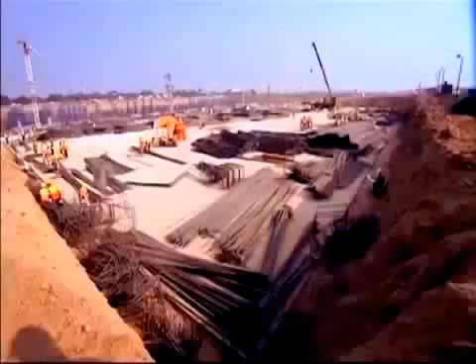A mammoth task completed against the backdrop of a looming deadline to the Commonwealth Games 2010. Thousands of workers construct India's largest post-independence building with unrelenting speed.

Technology was very much part of that system. I cannot change my specifications. I can't change the pipes. What are your deliverables at that stage?

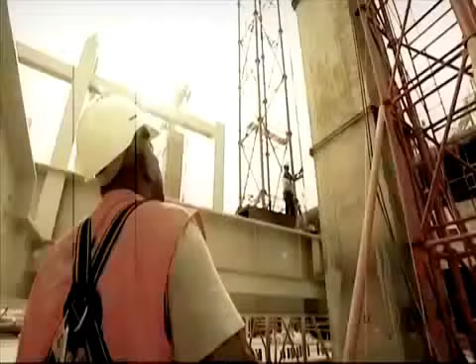This mega project brought in some of the brightest minds from across the world to design and build a state-of-the-art structure. Follow this team as they faced mind-numbing engineering challenges of installing a 45-acre roof and battled an unusual force.

Everybody said, no way, I can't put my name into this project because it is a seemingly impossible task before us. Watch this barren stretch of land on the outskirts of South Delhi, where a spectacular terminal megastructure comes to life in a record 37 months.

One of Asia's largest airport terminals, located in New Delhi. Terminal 3 is a symbol of India's emerging economic status.

With a capacity of 34 million passengers per year, it propels the Indira Gandhi International Airport into one of South Asia's most important aviation hubs.

This complex mega project challenged the creators, the GMR Group, at every stage of construction.

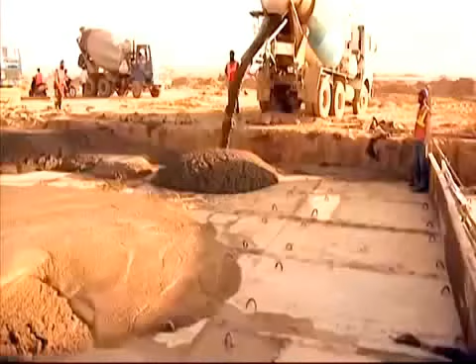On the southern outskirts of Delhi lay 300 acres of flat land, 3 times the size of the smallest country, Vatican City. In 37 months, this is where the new terminal rose.

On completion, it is said to be one of the largest and fastest built airports. An aerotropolis that represents modern Indian aspirations and infrastructure.

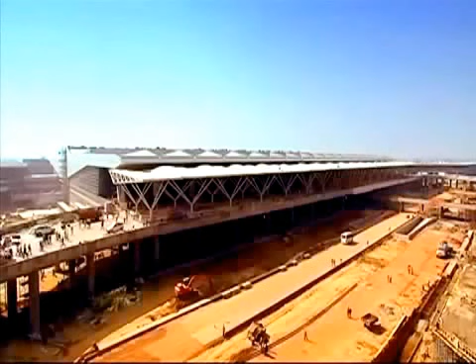In February 2004, bids were opened out by the government for the new terminal. The men behind the scenes had to be prepared for fierce competition.

We prepared almost for 1 year before, and we put the best people assembled for the bidding. I should say it is a God-given opportunity to fly the flag of GMR in the capital city of Delhi. That is the commitment which made us win this bid.

January 31st, 2006, the GMR Group won the bid, but for a company that started with agriculture-based industries and had slowly moved into the infrastructure space over the past decade, getting the basics right was tougher than it seemed.

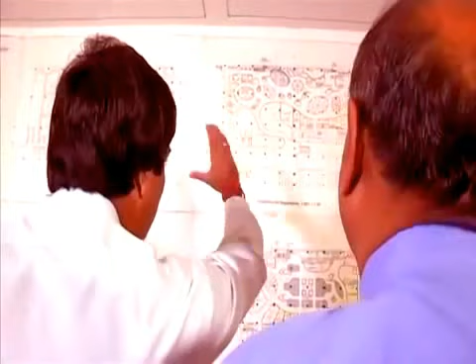GMR was new to the business of building airports, but raring to take off. Chairman G.M. Rao, the man behind the vision, set out the roadmap for the project.

We have taken almost 16 international consultants. And for us, at that time, spending 34 crores for bidding is a huge amount of money for me.

Heading the project was I.P. Rao. That's the workshop. I need, in 2-3 days' time, the whole design just to change.

An industrial engineering veteran, having worked on several power and steel projects in the past, I.P. Rao was the angry young man of the airport. Silent, strong and religious.

Typically, construction of new terminals across the world takes over 60 months. Changi Airport's T3 in Singapore took 76 months, Beijing's T3 took 60 months, and so did Heathrow's Terminal 5, from concept to commission. T3, T4, T5.

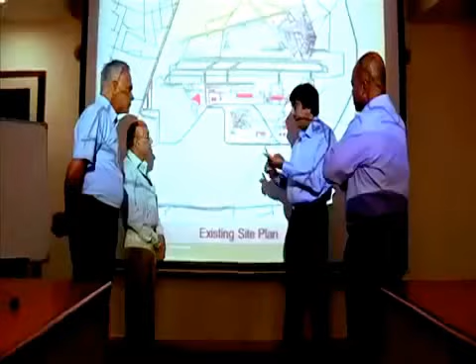At the very start of the project, I.P. Rao was faced with a challenge that tested his leadership. The GMR Group had bagged the country's most prestigious project, but then came a twist.

They requested us to shift the terminal from one side to another side. We had taken over the terminal which was built in the 1940s, and immediately after takeover people were expecting that miracles would be done. There were certain parameters which they fixed that we had to change. It was a terminal built for only about 12 million passengers, but it was already handling 16.2 million passengers by that time. It was a Herculean task, but we were able to do it. How to do that? So gentlemen, that's the workshop.

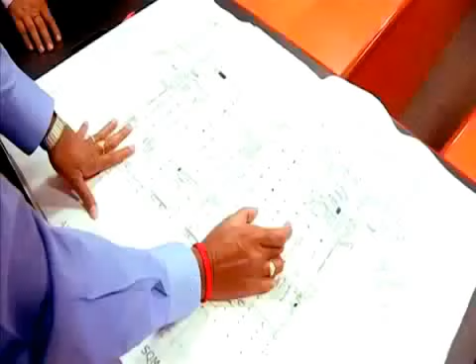It was April 2006. The master plan that GMR had presented was based on the government brief, but that had to be changed. It now had to come up at a location 180 degrees from where it was originally planned. Get more people, designers on the table, get all of you, and then sit down. I need a whole design just to change.

This had many implications. Also, at the time of the bid, the government had proposed the terminal for 22 million passengers. But GMR conducted a study along with the travel trade industry and learnt that the terminal needed to have a capacity of up to 34 million passengers. That was 12 million more - certainly not a small change.

The GMR team worked furiously on revising the master plan. But one thing, shift-wise have taken care of - the whole passenger requirement has tremendously changed. More than 1.5 times has been jumped, and then you have to redo the entire building and reroute the entire area. That's really given a big challenge for us.

The GMR Group studied various international airports like Dubai International Airport, Beijing Capital Airport, Seoul Incheon International Airport, London's Heathrow and Madrid's Barajas Airport to incorporate the best for Delhi's new terminal.

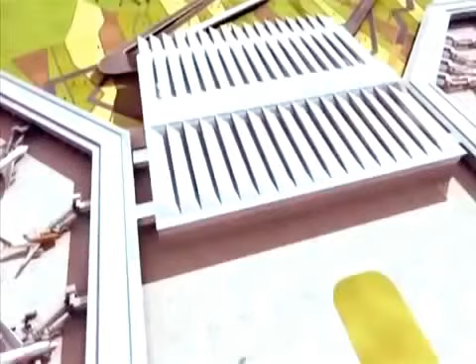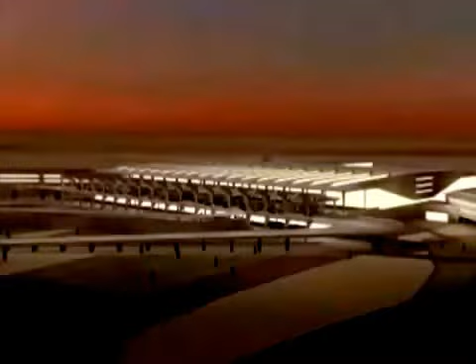Finally, in December 2006, the new plan was approved. The new passenger terminal building rises 9 levels, covers an area of 5.4 million square feet, approximately 94 football fields. The design is futuristic, with a strong emphasis on keeping it eco-friendly. Passenger flow is natural and instinctive, either moving towards the aircraft or away from it. Below them, almost 7 kilometers of baggage conveyor belts hurtle through, making for 5 levels of high-end automated security screening. At 4.43 kilometers, the airport's runway is the longest runway in Asia.

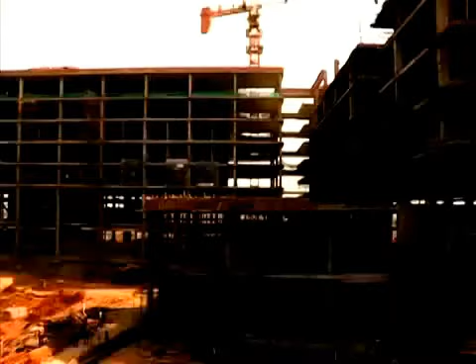Once the design parameters were fixed, construction got underway, but it was not as simple as it seemed. I should really give credit to the government that for the first time a private airport operator, a private company was called into a National Facilitation Committee, headed by the Cabinet Secretary and monitored by the Prime Minister himself. They were people who understood our challenges, and they've been pretty helpful for us to get clearances. Because the time was very short, we had to do planning, designing, identifying a contractor, and implementing the project all going on very parallelly.

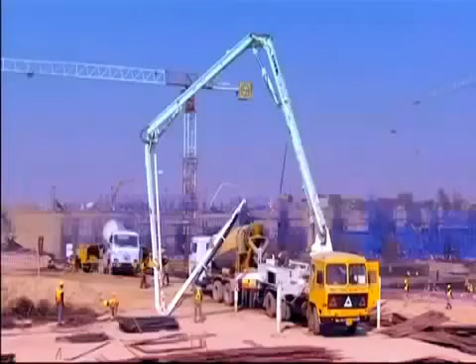Larsen & Toubro, one of India's largest construction and engineering conglomerates, took on the runway, taxiway, aprons and the terminal building. When we got into it, we had to mobilize nearly 1,000 engineers from more than 40-50 nationalities, mobilize 30,000 workmen, and mobilize concrete production of nearly 1,000 cubic meters per day. At first, the land was flattened out and then the earth excavated, enough to fill a 210-kilometer long freight train. This project needed tons of steel, concrete and other building materials.

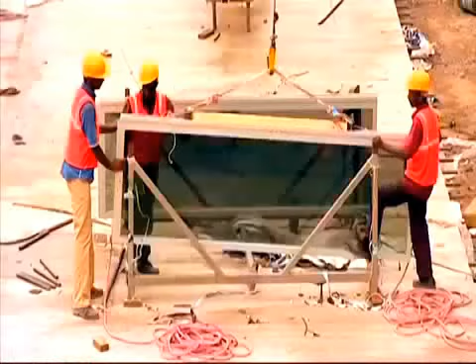Bringing materials into Delhi from across state borders posed a challenge. Heavy transport trucks can come into Delhi only between 11 p.m. and 7 a.m. We planned with the Delhi police, sat with them. These trucks have been verified and given a separate code. So these trucks have been lined up sincerely before the Delhi outskirts.

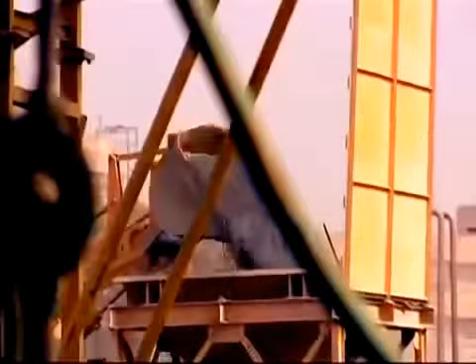To avoid disruption, it was decided to keep stocks of up to a month's requirement. The most modern and eco-friendly hot mix plant was imported from Italy and set up at site.

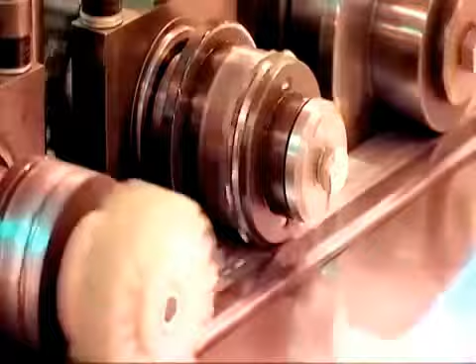Meanwhile, vendors were encouraged to move their fabrication units to the project site to cut down on logistic delays. We wanted to make sure, as much as possible, to have control of ourselves. So we bring the raw materials in and then we would shape them.

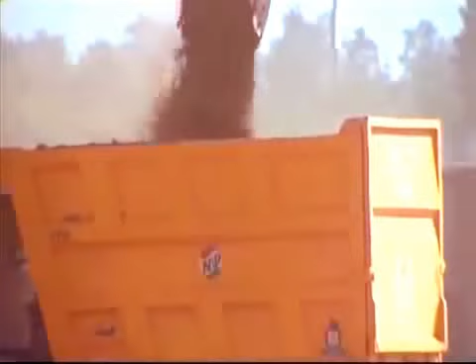Before excavation started, the site of the runway was being evaluated. Active and animated despite his 70 years, R.C. Rekhi was the mastermind behind the plan and design of the new runway. The runway was envisioned such that the entire system could handle over 70 aircraft movements at peak hours.

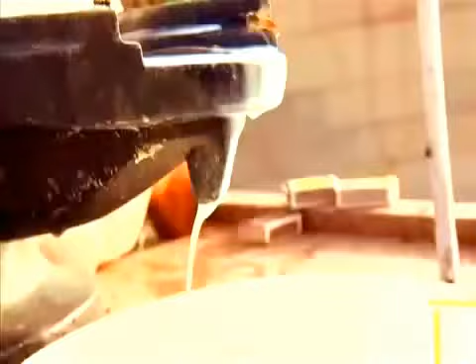But when the master plan changed, so did the direction of the runway. Now this posed a rather unique problem. The design and construction of Delhi's new runway was battling an unusual force. Simulation showed that there was a nearly 80 feet high Hindu god Shiva statue in the flight path.

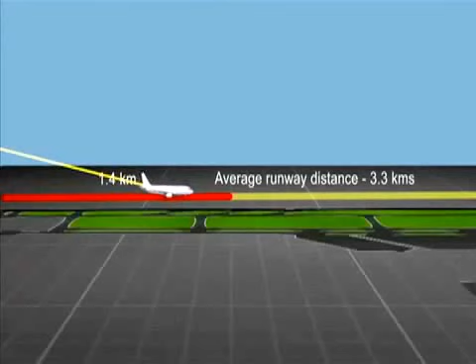Typically, incoming aircrafts must clear 1.4 kilometers of runway before they can touch down, but this was not possible due to the statue and its height. This meant all flights must land almost 2 kilometers after the runway actually starts, forcing the pilots to use full brakes and reverse thrust to slow down before the runway ran out. This was extremely dangerous and could lead to accidents.

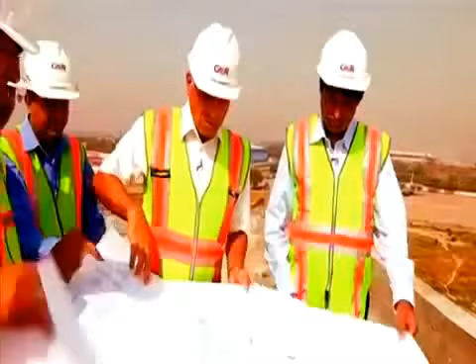Sir, we have to shift by 10 degrees. If we shift by 10 degrees, the whole plan gets disturbed. So I told them, tell me, to what degree does the Shiva statue have to come out. We found 3 degrees. I fixed the runway and told them to go ahead. They were shocked. Sir, nowhere does this happen like this. At last, a solution emerged.

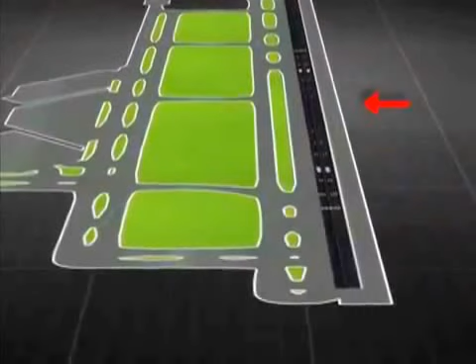The new runway was planned at a slant of 3 degrees from the original and was eventually extended by 1,460 meters to be compliant with air safety standards. At 4.43 kilometers, runway 11/29 is one of Asia's longest runways. This allows planes to approach and land safely.

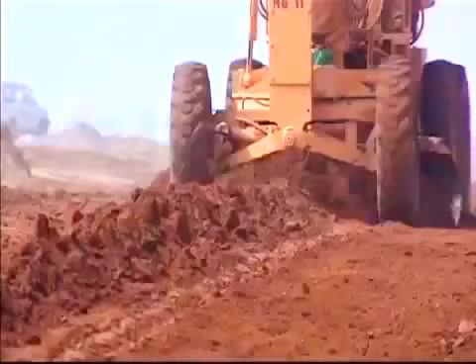Construction finally began. But there was another problem. The site of the new runway had been a swamp for several decades. This had grave consequences for the new runway. This meant that soil on the runway site had very low load-bearing capacity, not enough to take aircraft load and landing impact.

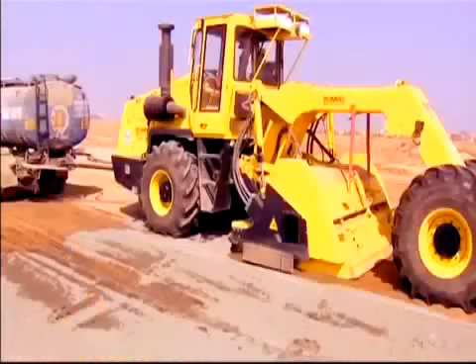Ultimately, the load imposed by the aircraft has to be transmitted to the soil only. If the soil has a bearing capacity which is far lower, it only means that your pavement thickness must increase correspondingly so that this load is transferred over a larger area of the soil. The solution: strengthen the soil by mixing it with cement and using glass grid fabric between the layers to increase the bond between them. For the first time in the country, we did this base layer with a cement-treated base. The aim was to design it for next-generation aircrafts like the A380s with a takeoff weight of 550 tons.

For the terminal structure, the real challenge was to keep the design simple and construction well planned. A lot was at stake. How will all this come together without chaos and wasteful mistakes?

Meanwhile, the existing domestic airport needed urgent attention. The existing facilities were creaking under the huge increase in traffic, both of passenger and aircraft movements. The domestic terminals were designed for 12 million but were already handling 16 million passengers. Improvement works had to be carried out in a saturated terminal, so it was a stupendous task, I would say. No other airport in the world has actually gone through this kind of rigor.

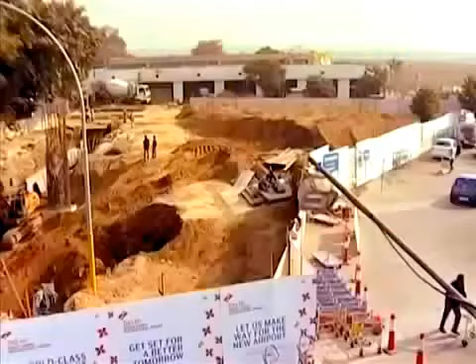GMR went on a war footing to solve this problem. We felt certainly there is an important need that we have to start a new terminal to decongest and also parallelly make it ready for T3. Terminal 1D was built to ease the pressure in the interim.

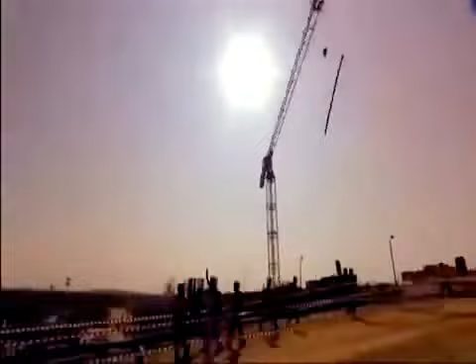Over 30,000 workers were on site in peak summer, through dust storms, the monsoons and foggy winters. Often they worked in precarious conditions, manning heavy machinery. At times, power would be intermittent, leaving electrical cranes hanging dangerously. Men would be caught in lifts and in darkness.

Uninterrupted power was a key word for Sujit Nag. Highly disciplined and process-driven, Nag had to be on top of it all the time. There was no room for mistakes.

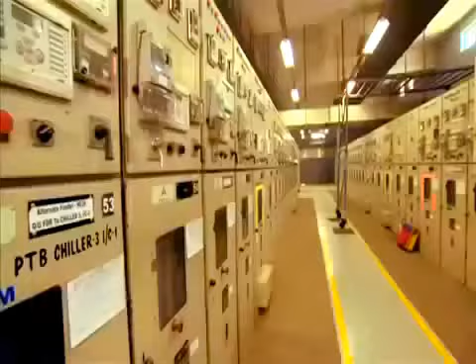An electrical engineer by qualification, Sujit had worked in the US, UK and Asia, setting up power plants. Mammoth projects with pressured deadlines. But he had never worked on a megastructure like this one.

His main responsibility was to power the construction works and later the Terminal T3, which would have millions of passengers walk through it from all parts of the globe.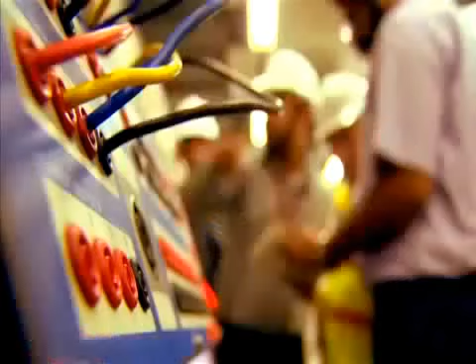The very basic need of having the power supply from the distribution company, that was not ready. So obviously we had to carry out a temporary arrangement. The biggest challenge is that I commission the system, and at the same time, I give the power supply to the operational team.

Anil Dhawan, head and construction manager of T3, was a man on the move. He is athletic and passionate about fitness, whether he is on site or in office. In a military-like manner, Anil led the team that constructed the terminal.

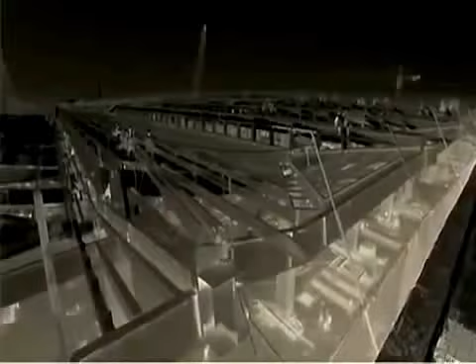Anil's big challenge was to assemble the roof. The expanse of the roof and the pier spread over 45 acres, and an 18,000-ton steel structure was to be installed on top of it.

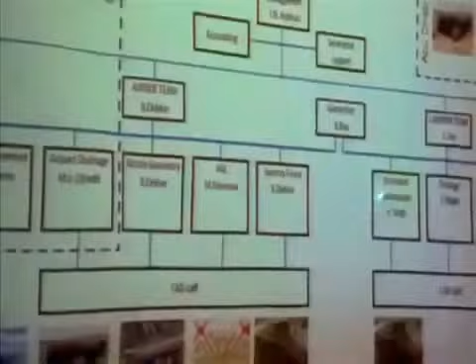The GMR team went over every engineering detail with a fine-tooth comb. Was the design sound? What kind of equipment was needed to achieve this task? What are the specifications that you would actually need? Anil needed to find answers soon.

Any delay in completing the roof would have cataclysmic effects on the costs. They had to cover an area of 45 acres with structural steel that was fabricated and brought in from Singapore. The critical element was the girders, which came in dimensions of 5 to 10 meters each.

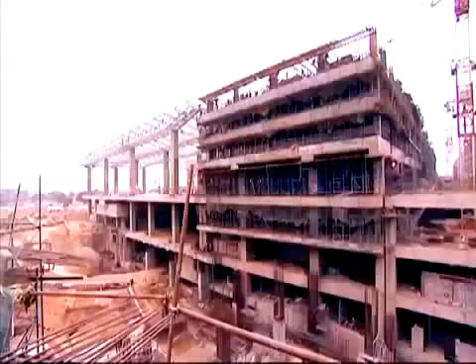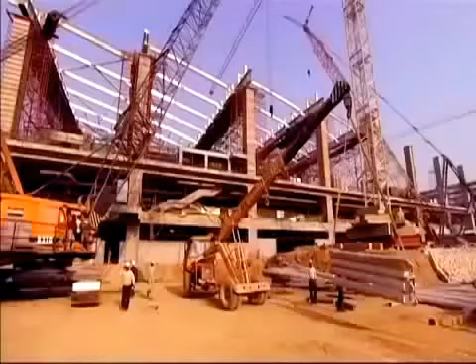For engineering purposes, the roof was divided into the land side and air side, and further divided into 6 smaller units for efficient handling and placement. Each of the 6 units weighed heavier than an A380 aircraft.

We allowed ourselves about 6 months to actually complete the roof from start to finish. There was no room for error.

Erecting the roof was a key milestone in terms of the project timeline, as it was only after this that all the other civil and technical works followed. The weather was a key factor here.

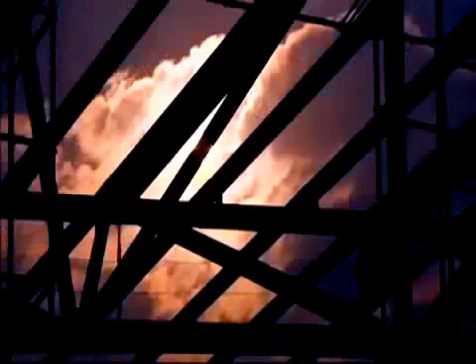Our original plan was to have the roofing installed by April of 2009. The monsoons were only 5 months away, and GMR had to finish the roof structure before the rains lashed through Delhi.

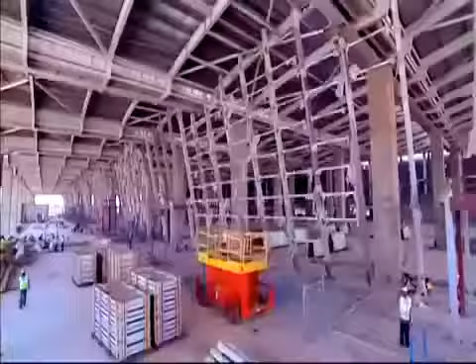Anil's team had been preparing intensely to begin fitting the roof structure, and they were now ready to start. Each of the units was first assembled at the 10-meter departure level.

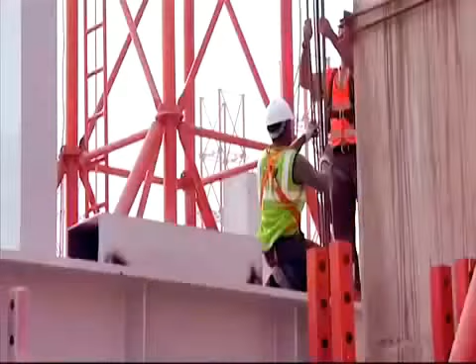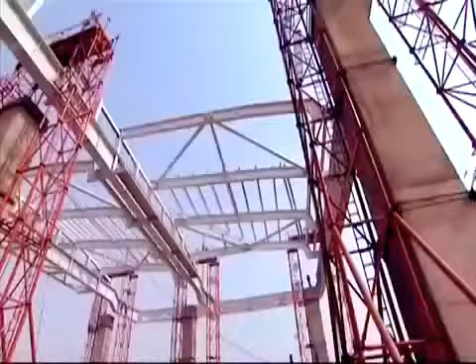Then raised 18 meters using computer-operated hydraulic jacks. Every millimeter lift had to be done in unison, its alignment checked multiple times. A minute glitch could have disastrous consequences on the project timeline. Engineers were on edge as this sort of lift required utmost precision.

Each lift took about 6 to 8 hours. But designing the lifting system took us 2 months, and getting the jacks required for us took another 2 months. So really, physically to start at site, we were 4 months backward on the table. 22 months left to go.

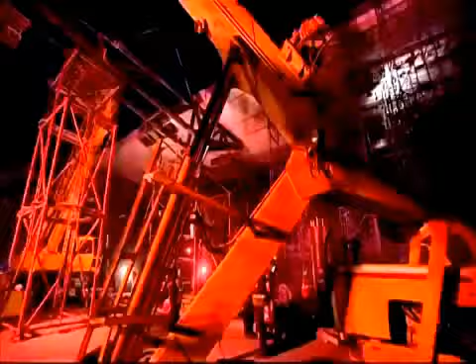The terminal building was rising fast. The man who would turn this into one of India's most intelligent buildings had a challenging time ahead.

The airlines cannot connect to the back office. Davesh Shukla was young, hungry and powered by a strong creative streak to create something one of its kind. If his IT systems failed, the entire airport would collapse.

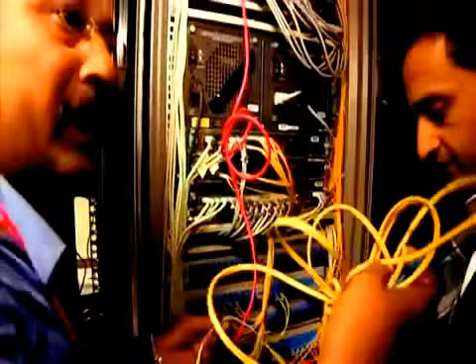The goal was to bring in efficiencies, better operation procedures, and make people's lives easier. And at the end of the day, that's what integration is about. By the time we finished, it was more than 75 systems that we started integrating together.

If Davesh has his way, then his IT systems will connect every system in the airport, from check-in counters, baggage handling, airport screens, lighting, passenger movement systems like boarding bridges, emergency systems like the fire department, and key services like immigration. It is practically the lifeblood of the airport.

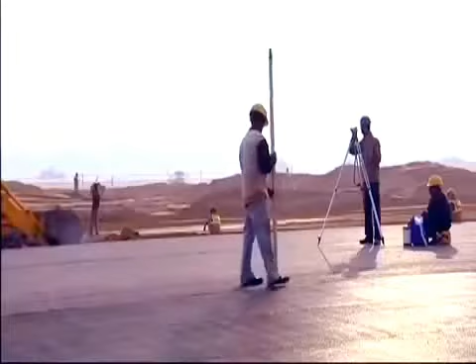The aim being to make for a faster turnaround of planes taking off and landing, and most importantly, giving the passenger a smooth experience. Meanwhile on the runway, Rekhi and his team were on the last leg of finishing the construction. They now had the challenge of delivering a high-tech runway.

Here's the problem. There was a dense fog that settled over Delhi during winter that resulted in very poor visibility. Flights were either cancelled or delayed as they were unable to land or take off in these conditions. To make matters worse, the runway site was close to a green belt, so the intensity of the fog was even higher around here. To counter the thick fog, it was decided that the runway was to be made Cat 3B compliant, which meant it will allow flights to land and take off even when visibility is as low as 50 meters.

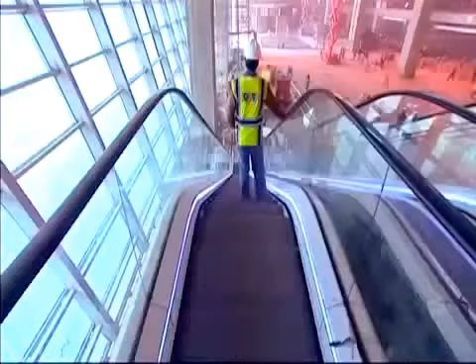An Indian origin Singaporean citizen, Roy, is a people's person, but he had no easy task. He is responsible for everything that enables movement in the terminal: travelators, passenger bays, and baggage belts. He had to set up the complicated maze of belts that would safely transport and handle 12,800 bags per hour. The expected footfall by 2020 was projected to be over 60 million.

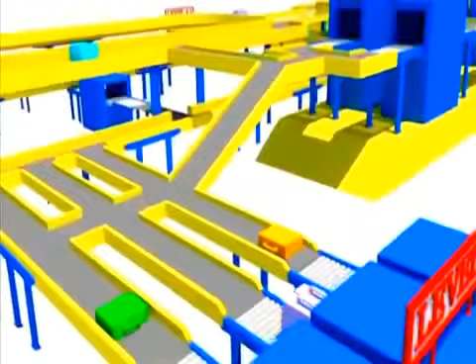We actually went into Changi Airport, KLIA, Hong Kong CLK, including Munich and Heathrow, London. So there we actually tried to understand exactly what best practices they follow. The baggage handling system design was a complex one. Terminal 3 has a state-of-the-art complex that features the common use terminal equipment baggage handling system with explosive detection technology for greater efficiency and security.

Hello, hi ma'am, how are you?

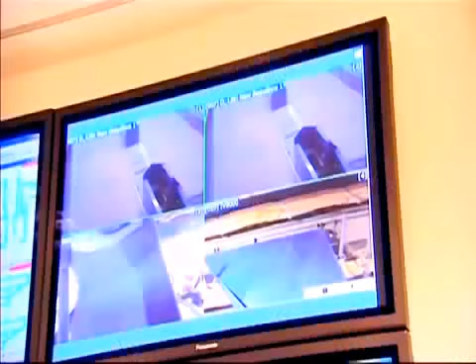Once the passenger checks in their bags, the bags go through a number of checks. At first, if a bag going through the X-ray check is found to be suspicious, it is automatically separated and diverted through another channel. If that is actually clear, the bag will go to the respective destination. And if it's not clear, we have a team of security experts who will visualize these images and interpret their content. And if it is accepted, it will go to the respective destination.

And if it is rejected, it will go to the next level of screening, which is our CT screening, where it will slice the bag into 65 different pieces, inspect and take a decision. Where if it is rejected again, it will go to a team of experts reviewing those images again. From there, an accepted bag will go to the destination, and a rejected bag will go into level 5 screening area.

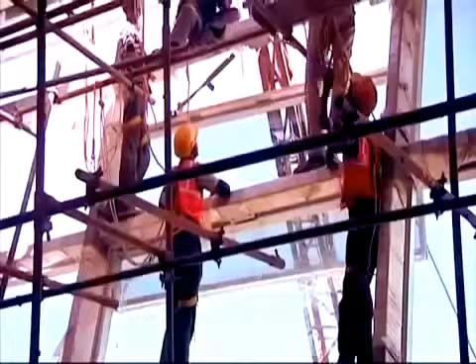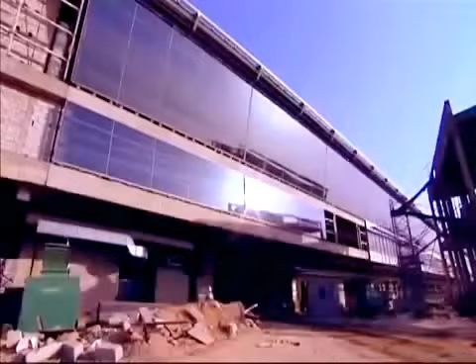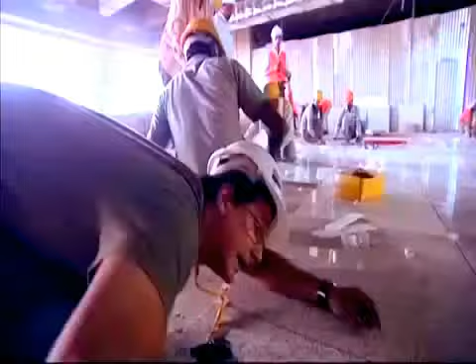Work on the baggage handling system began and the key contract was awarded to Siemens. In other parts of the terminal, glass was being fitted. Flooring was simultaneously being laid and was closely supervised. Check the level after each step. Laser-guided measurement tools were used to ensure that over 100,000 square meters of granite tiles imported from Bahrain were properly aligned. Yes, like this, this is perfect.

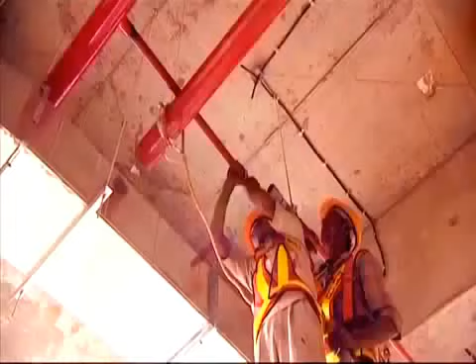With multiple vendors at work, clashes broke out. It threatened to upset the schedule, result in cost overruns and engineering nightmares. So in September 2008, GMR brought in BIM, or 3D Building Information Modeling software. You fed in all information and technical specifications of each aspect, power, baggage handling, IT and security, and it simulated conflict areas, programmed the flow of work and resources required.

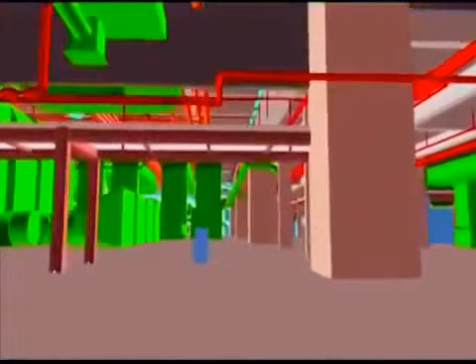This stage of construction was the most pressured. I think this was probably the only project, the first project to have employed that, and to have actually developed a 3D model where all the obstructions were looked at and cleared prior to installation. We saved cost, we saved time, and we were able to produce a quality product.

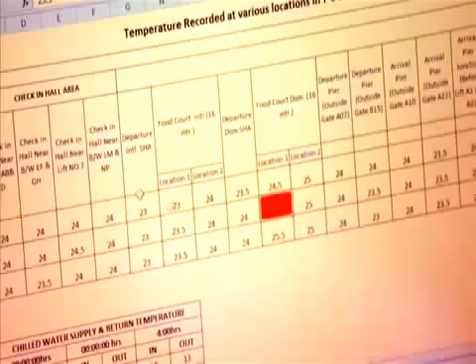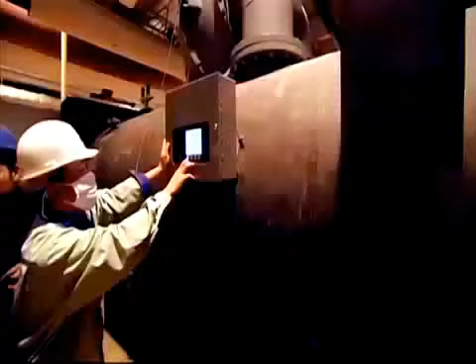Sujit Nag had an added brief to ensure that the airport was environment friendly and LEED certified. Temperatures in Delhi range from 5 degrees in winter to an extreme almost 45 degrees in summer. All the glass meant higher power usage to keep the area cool and comfortable for passengers. It was a tricky balance of maintaining good lighting conditions and keeping the heat out. The roof was designed with slits to take advantage of and use natural light. A central monitoring system, CMS, is used to control automatic sensors that detect day and night times and sets temperature and light accordingly to use the least energy.

We are the first airport to achieve this. No other airport in the world has got a green building certification in the gold category.

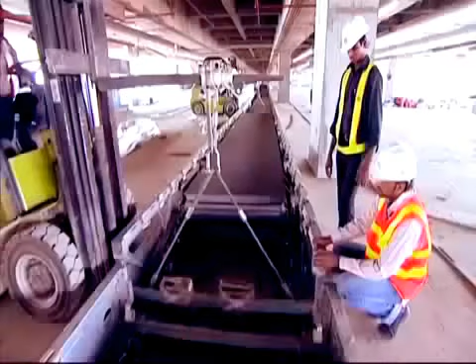It's action stations at all ends and the deadline is crushingly close. Will everything come together in time?

Meanwhile, Anil was racing against time to finish the roof before the monsoons arrived. On the air side, GMR adopted the pull method to install the roof. Cranes carried the massive structural steel girders to the top of the tower, where each section was assembled and pulled to an intermediary level. Finally, with 4 massive horizontal pulls, the roof layout was completed.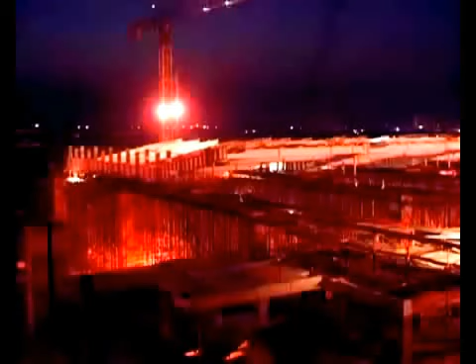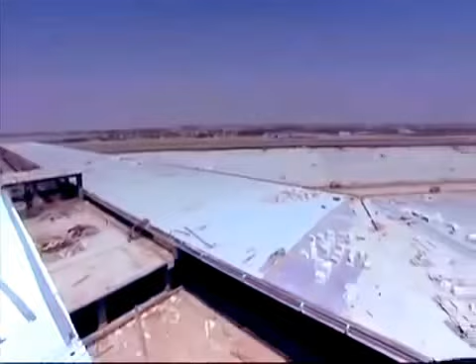Week after week, 18,000 metric tons of structural steel was fabricated, assembled and raised. The roof of the terminal and the pier spread over 1.3 million square meters. The 7-layer sheeting system was designed to provide the highest degree of insulation and sound deadening. Finally, the roof was covered and completed.

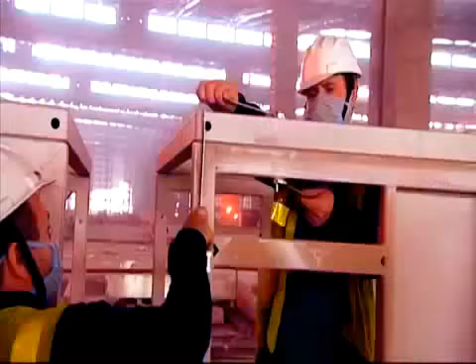It was a key milestone. Engineers and vendors already at work on site redoubled their efforts, now adding all the elements that turned what is said to be India's largest post-independence public building into its most prestigious airport.

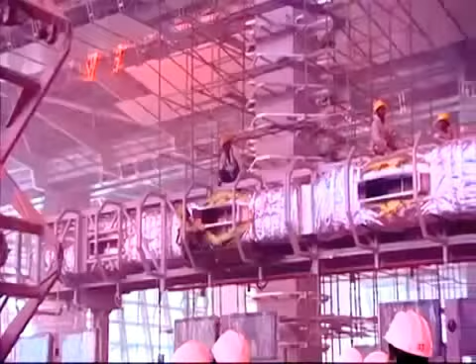Suspended from the roof were a number of essential services like the air conditioning, fire prevention sprinklers and lighting fixtures. All these had to be in place before the false ceiling hid them away from the view of the visitors.

For the ceiling, L&T was called in. The false ceiling contractor got into the job and then realized that there's such a massive area that all the false ceiling people in India put together could not manage this. So we had to train our own people, get them inside.

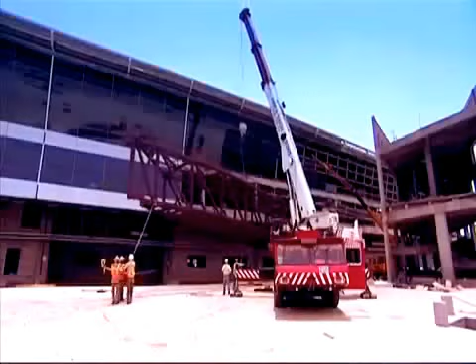On the air side, a complex set of processes were at play. Roy oversaw the installation of the passenger boarding bays. These were manufactured in China and Japan and transported to the project site in Delhi.

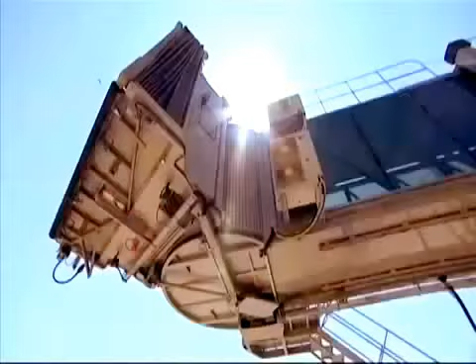They are delicate units that fit into the aircraft door at one end and at the terminal on the other. Any damage to the units would render them useless or dangerous to install.

July 2009, Roy and his team were tracking progress. Then one night, he received a call. 2 of the trucks transporting the delicate passenger bays had overturned in an accident.

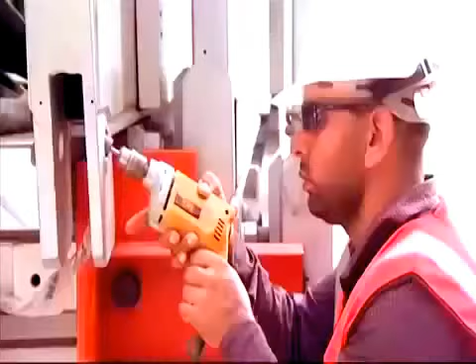The bays were badly damaged. With just 8 months to go, it was impossible to manufacture new units.

Roy had to come up with some other solution. They tried to actually recover these 2 units, but it was not possible because of misalignment.

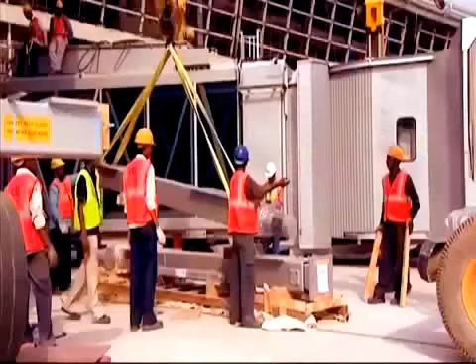And we, together with the factory team members, sat together and diverted 2 bridges which were actually meant for other airports, converted that with our dimension and transported back on a timely basis.

Roy and his team started installing the bays. It took 6 hours to install each one, and there were 78 bays to be installed.

It was high alert on all fronts. All departments were working furiously 24/7 to complete construction, fittings and interiors.

In about 180 days, starting January 2010, all systems were to be put to test in a 24-week drill, the Operational Readiness and Airport Transfer, or ORAT.

Andrew Harrison was a man living on the edge. He is the Chief Operating Officer for Delhi International Airport. He led the operational readiness and transition to the new integrated Terminal 3.

Before joining GMR, Harrison had worked with TBI, Gatwick and JFK airports. But in India, its people and its work culture were all new to him.

We engaged Munich Airport, who have successfully done ORAT in a number of airports, including Bangkok, including Hyderabad. And we engaged them because they have a lot of experience. But very importantly, we had a team built around them so that that experience and that knowledge could be transferred to our team.

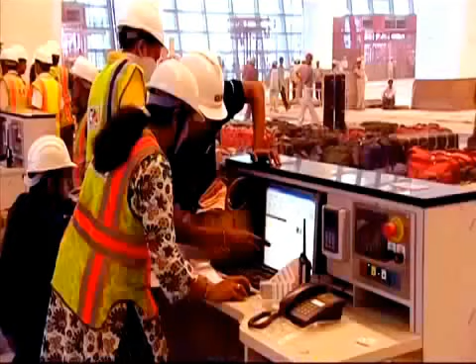Were construction and systems ready on time? Did they pass the tests Harrison put them through? You are professionals, act as professionals.

Finally, the ORAT, which is a test run of live airport scenarios, begins. For 6 months, 56 trial drills using 50,000 mock passengers were conducted to test all systems and processes, each one a little tougher than the one before.

Here is one scenario. The baggage handling system had to be tested with over 27,000 dummy bags and identification tags created for 36 flights.

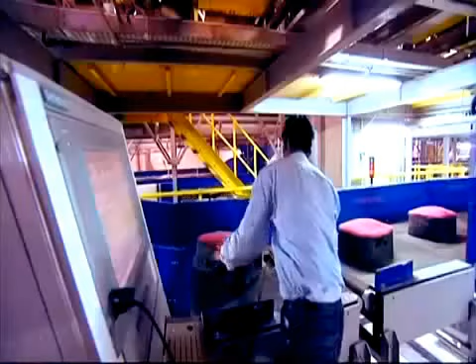All check-in bags had to be tagged with a code to enable automated identification so the bags could be sorted and loaded into the respective airlines without glitches. Any error could hinder the check-in and boarding process and result in flight delays.

GMR had to make sure airport staff were fully prepared to operate the complex 5-level automated baggage system, and this needed meticulous planning. It was painstaking and exhausting, but had to be done.

This is the paging announcement.

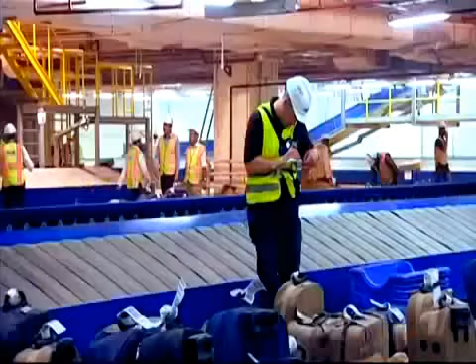There are also a number of systems like check-in counters and flight schedules that had to work together seamlessly. Our difficulty is the airline back office connectivity, that the airlines cannot connect to the back office.

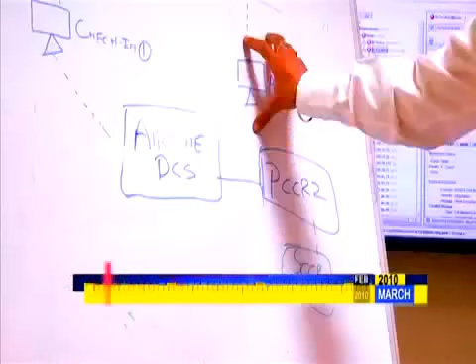But all was not well with the terminal's IT system. In February 2010, things were suddenly close to breaking point. The problem is ORAT has started.

With merely a month left for completion and a couple of months before opening day, he realized that the IT network designed for the airline back office system did not meet the requirement of the airlines. That would mean that we cannot open the airport up, or if we open the airport up, the airlines cannot do the back office functionality, and that would cause huge grief to the airlines and ground handlers. So at that point, we thought that if we don't get this right, then we're going to have an issue with the airport operation.

Managing people was equally tough. One big challenge for Andrew was changing the mindsets of the workers and training them to use the new technology.

Opening was now just a month away. The operations control room under Andrew was monitoring every square inch of the airport, with over 3,000 surveillance cameras rolling 24/7.

The artwork and finishes team was also on overdrive, overseeing installation of elements that gave Terminal 3 its character.

Project head IP Rao was on one of his many rounds of inspection. Before he gave the thumbs up for opening day, he had to ensure all bottlenecks were cleared and there were minimal teething problems.

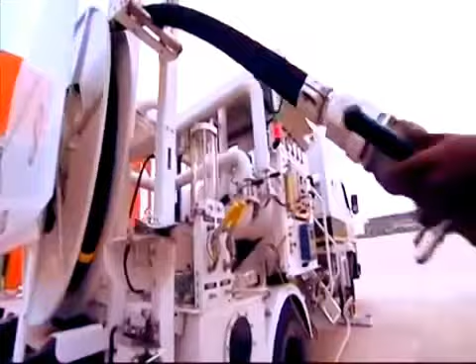Down below, the baggage conveyor belts swiftly rolled into action. Out on the apron, the fire tenders and refueling vehicles fell into place. The first commercial flight docked at Terminal 3, bringing in travellers who marvelled at this first-of-a-kind structure in India.

I'm actually stunned, I love it. I'm really glad that we've managed to do this, and it's definitely one of the better airports I've been to.

After 37 high-pressure months for the GMR-led team, T3 in New Delhi is now a visible symbol of New India and her new economy. We are very happy that we are also meeting the same standard as other airports internationally. Whenever we used to come here, it was always a bit of a disappointment, but now I think we have come over that and we are very, very proud.